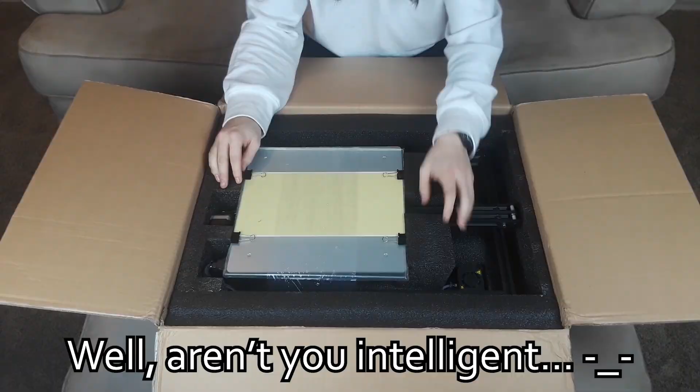Alright, got some foam here. This must be the printer bed, judging by the fact that it's glass, and I'm going to set this aside for a second. Looks like this is the electronics box, and this is the actual part that does the printing. And looks like it's got some painter's tape or something. I don't know what that's for.

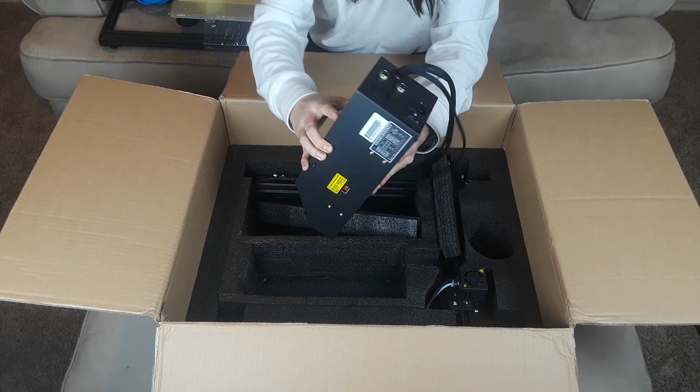My guess is this is all the spare parts and the screws and whatnot. Okay, I have no idea what this is. Looks like we got some Allen wrenches and zip ties there. Alright, let's move that aside. There we go, and it's all in Chinese. Got another frame piece here, it looks like.

Oh, and it comes with filament. That's nice. What kind of filament is this? PLA? Okay, that's very nice that it comes with it. I was worried I'd have to buy some separately, but no, I got some right here.

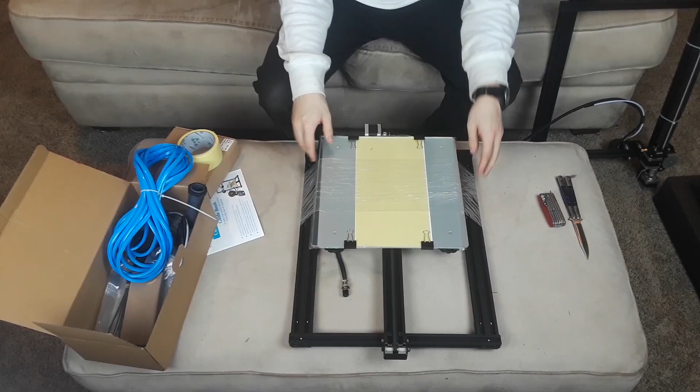That is mine. So this must be the part that lays flat, and this connects in here on this, or here somehow, probably here, judging by the width. So yeah, we'll figure that out here in a minute.

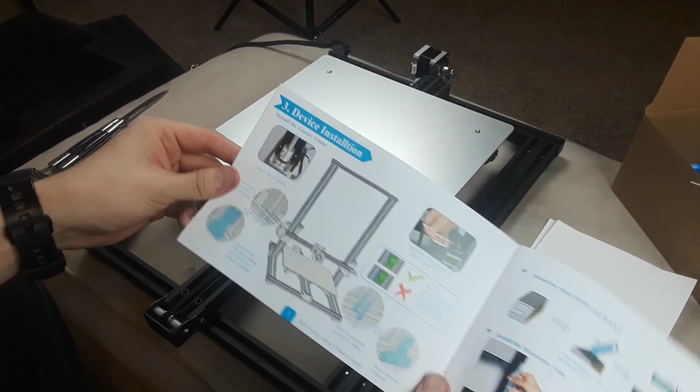All right, so I'm going to go ahead and attempt to put this thing together using this guidebook. Okay, disclaimers, content, terminology, more terminology. Okay, device installation, install the gantry frame.

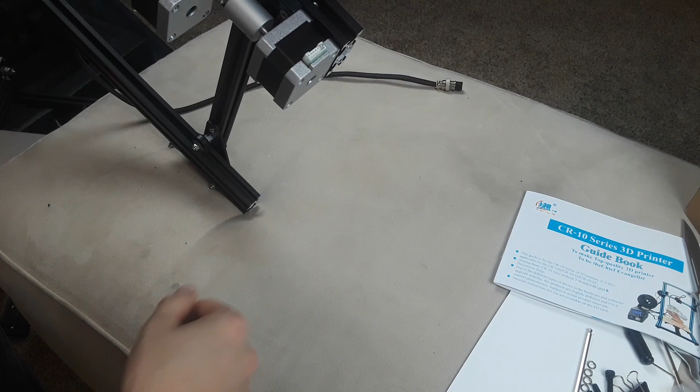Alright, looks like I'm going to probably have to set this thing on its side, like this, and then put the base frame right here, so they can get those screws in there. Alright, pretty solid right there.

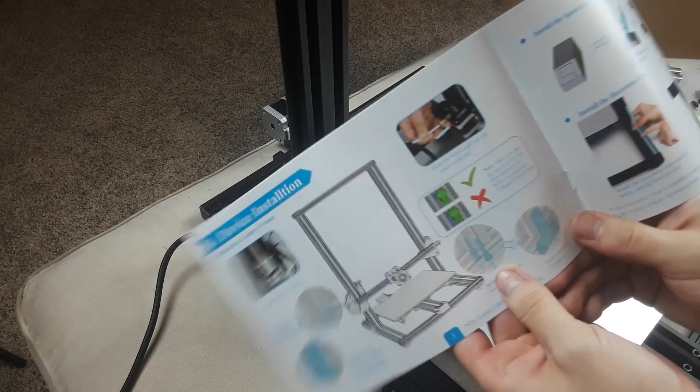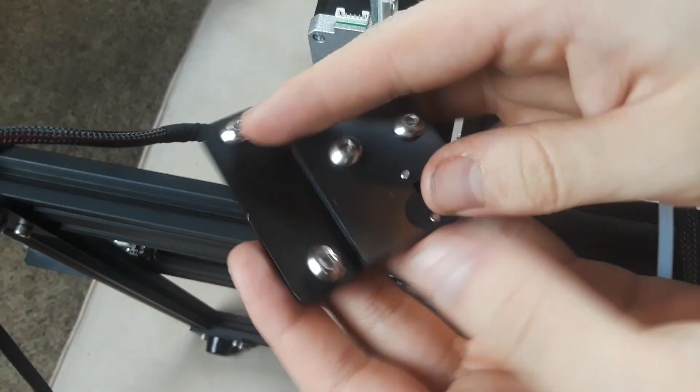Set it down. It looks like the T-brackets just further solidify the connection between the gantry and the base. So this is the left one, and I think from the looks of it, it has to be set like this. So this connects to the base, and this connects to the gantry. And on the right side, same thing: this connects to the base, that connects to the gantry. And these T-brackets are weird. From the looks of things, they're supposed to hook in this groove here instead of go in those holes there.

All right, it's a little hard to see, but that metal piece in there, the hook, is currently parallel to this groove here. So watch what happens when I go ahead and tighten this nut. It rotates on its own, like that. Alright, that's the T-brackets installed. Let's see what we got to do next.

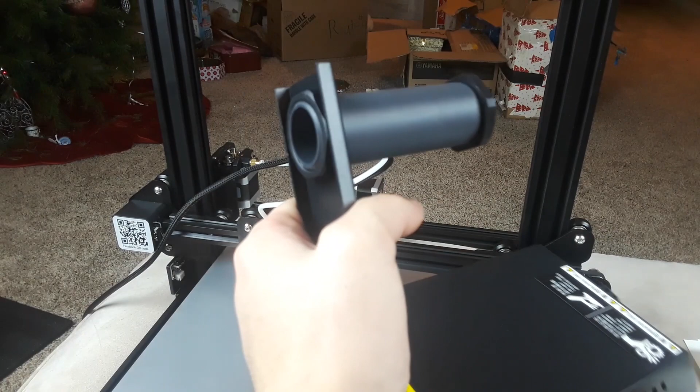Yeah, that's what that is, so let's go ahead and do that. Okay, so that page is done, so let's move on to the next one. So we got to install the spool holder, which is these two pieces, to the control box. So I guess we're done with the actual printer itself for the time being. Alright, that's done. Now let's move on to the next thing.

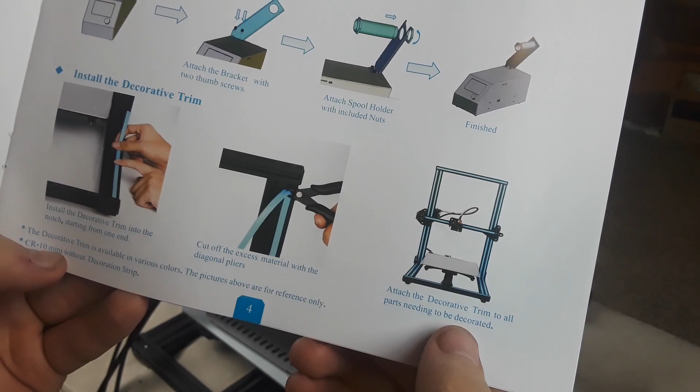Install the decorative trim. Okay, attach the decorative trim to all the parts needing to be decorated. Well, I kind of like it when it's black, honestly, like it is right now.

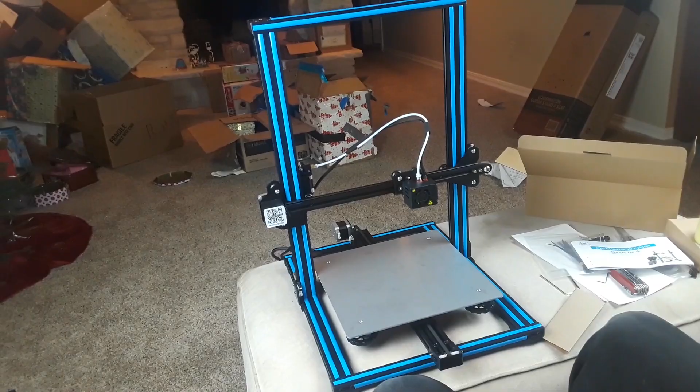Alright, I got most of that blue stuff on there, but I ran out of it. A bunch of the ones on the back are not filled in, so... send more of this stuff.

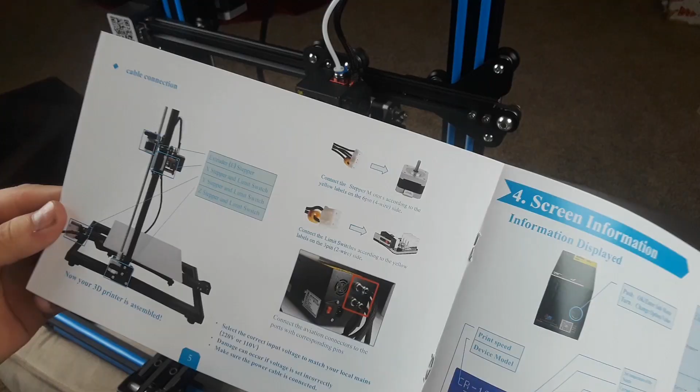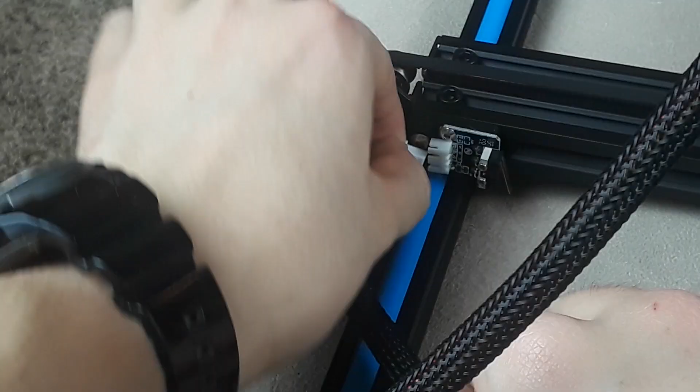It's too expensive. Cable connection. Okay, like that, and then this. There we go, got it. Alright, 6-pin right there. There we go, there we go. Let's screw that in there. Alright, let's get this other one. Okay, and is that it? Okay, so yeah, we're pretty much done.

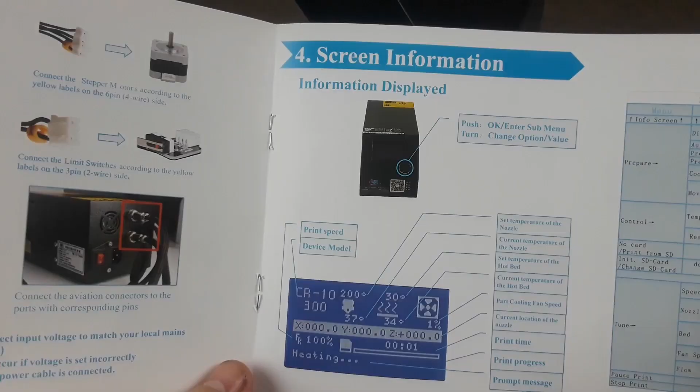It's assembled now. All right, so now I want to go ahead and test this thing out and see if we can print something, but I gotta move this thing over in the corner there because the power cord is pretty short, sadly. Not a big deal, but yeah. So just give me a second.

All right, let's try loading the filament now. Okay, a little hard to see, but yeah, there's filament coming out of the bottom now. Perfect.

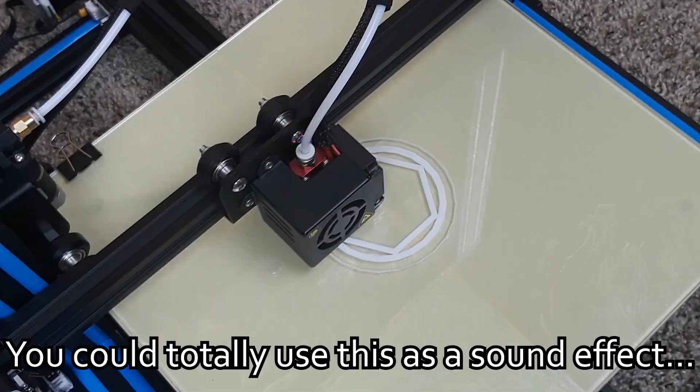All right, I was finally able to get a good 3D print from this thing after a bunch of failed attempts here. You suck. Turns out it was just the bed leveling, but I finally got it right, and I also added some support material on the edge here that you can just peel off, and got this thing, and it's solid too. It's very solid.

So I'm pretty happy to have this. It works pretty well, and I'm going to be using it for the channel and also the business. But I wanted to unbox it and do at least one print job with it just to show you.

And man, when you finally get something like this to work, it's just so satisfying, especially after all the frustration I went through, because this one here was the first decent print, but it didn't finish. It was still working on the internal support material. And at some point it lost control and it stopped sticking to the tape there.